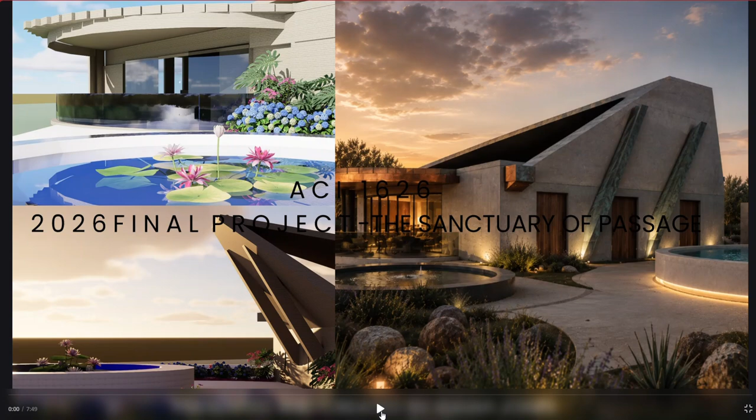Hello, good evening. I'm Isaiah Jones, and for my project, I have created a sanctuary titled The Sanctuary of Passage. This project goes into depth detail about my design, its iterations, and the design process that created my Sanctuary of Passage.

The concept word that I used to influence all of my iterations for my project was Regenesis. The Temple of Regenesis is a monumental sanctuary where earth, nature, and light converge to honor the deceased and celebrate the cycle of life, death, and rebirth. Through stone, wood, and steel, the architecture becomes a universal spiritual language rooted in nature and open to all faiths.

My sanctuary site and schematic design analysis. The strengths, weaknesses, and opportunities, as well as the threats, are all listed on this page. The strengths have an open space in nature and the stillness in the woods that supports the site's purpose to be used for meditation, mourning, and a life cycle.

The weakness is the pests in nature and the natural corruption of environment due to natural causes. Opportunities that can be listed in the sanctuary are cultural interest in spiritual spaces, nature and integrated design, high foot traffic, and potential city development support. The threats are, of course, the wildlife, as well as flooding, nature corrosion, and the decay of natural materials due to weather, like the wood that is used for the sanctuary.

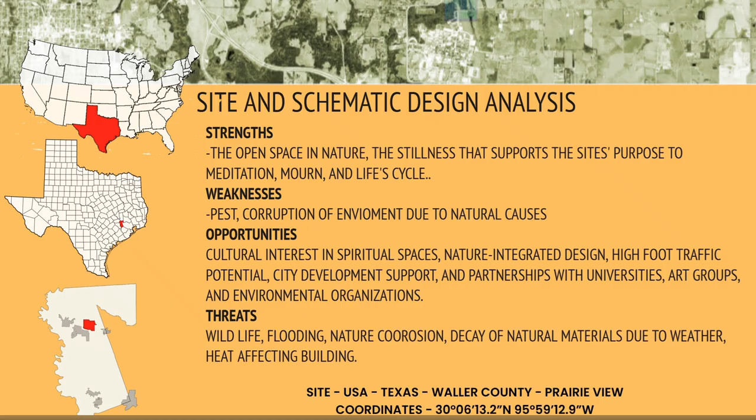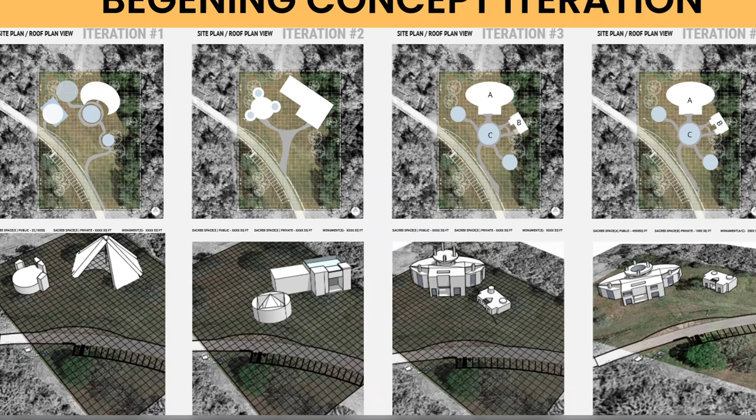With my beginning iterations, my design evolved from basic abstract geometry to a more complex, spiraling, symbolic architecture that physically manifests spiritual transformation. Each iteration refined the relationship between form, water, and light until the sanctuary becomes a living symbol of rebirth and unity. After several iterations, my sanctuary is no longer just a structure, it is a spatial ritual.

It captures the essence of a sanctuary by unifying form, function, symbolism, and site into a coherent experience of life, death, and rebirth. Every iteration built towards this monument of clarity, a place where architecture becomes spirit.

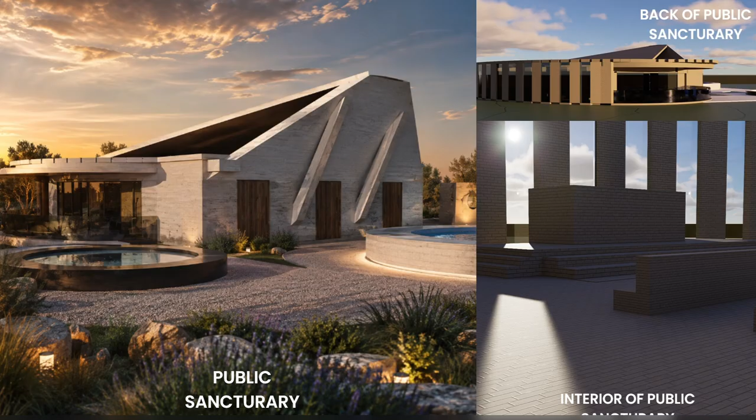With my monument, the three bodies of water, life, death, and rebirth, form a continuous spiritual cycle that honors those who came before. Each pond acts as a living memorial, life representing the vibrant energy and legacy of the individuals who once walked the campus.

Death acknowledges their passing, the stillness of water mirroring the silence and remembrance. Rebirth symbolizes healing and continuation, the campus and the community rising to recognize and preserve their stories. The water's reflective surface invites viewers to see themselves within history, turning memory into participation.

As light moves across the ponds, it transforms the space into a sacred landscape, a place where unmarked graves are no longer invisible, but revered through nature's eternal cycle. This design becomes a spatial and spiritual act of reclamation, uniting architecture, memory, and healing in Prairie View's continuing story.

Precedent sanctuaries that I used as inspiration to create my sanctuary are the Baha'i Temple of South America, as well as the Mountain Church of Julong and the Lotus Temple in Delhi, India. These sanctuaries each played a large key role in my building design, such as the glasswork in the threshold inspired from the Baha'i Temple, or the open glass frame and linear pattern of glass on the face of the sanctuary inspired from the Mountain Church of Julong.

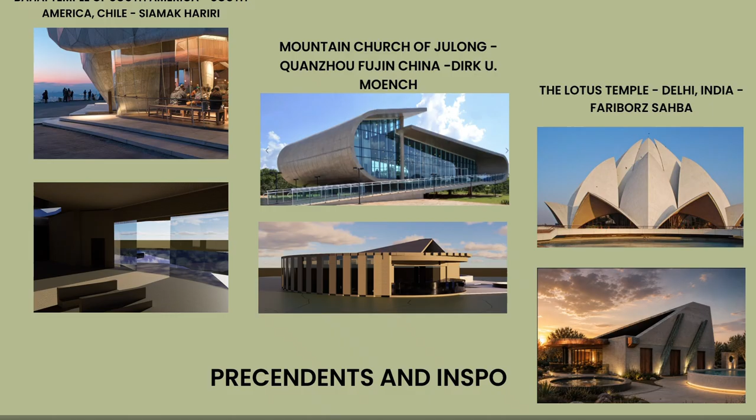My sanctuary's elevations and sections show how form, light, and symbolism merge to create a space that is both physical and spiritual, a place where transformation and rebirth takes place. The elevations highlight the dynamic roof geometry, which rises sharply to symbolize ascension and transcendence, a visual metaphor for spiritual awakening as well. The sectional cuts reveal how the interior volume

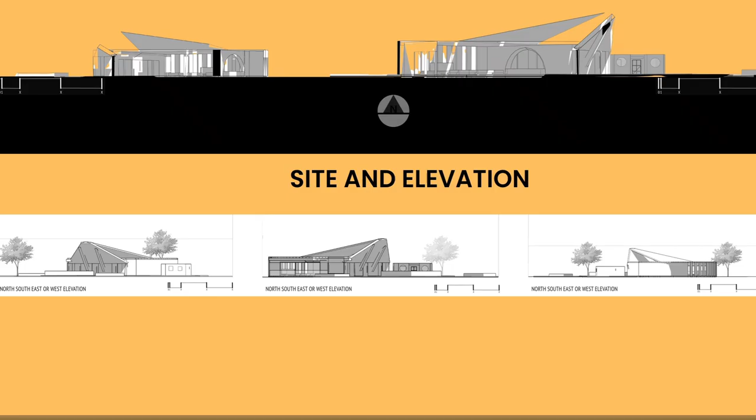unfolds and compresses entry spaces to expansive sacred chambers. My sanctuary's floor plan lists in the keys: 1, the public sanctuary's foyer; 2, the public sanctuary's private reflection hall; 3, the men's and women's public restrooms; 4, the public sanctuary's prayer pit; 5, open balcony space; 6, the courtyard; 7, private sanctuary; 8, private sanctuary's private restroom as well.

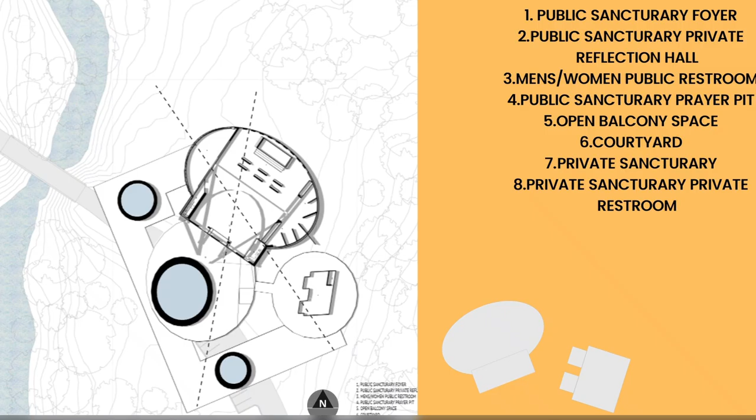Lighting, color palette, and material work together to create a calm, sacred, and transformational environment. Indirect lighting softens the emotional tone, neutral colors unify the architecture with the water, and smooth, reflective materials reinforce the symbolism of life, death, and rebirth. Light texture adds warmth and human presence, strengthening the spiritual atmosphere of the design.

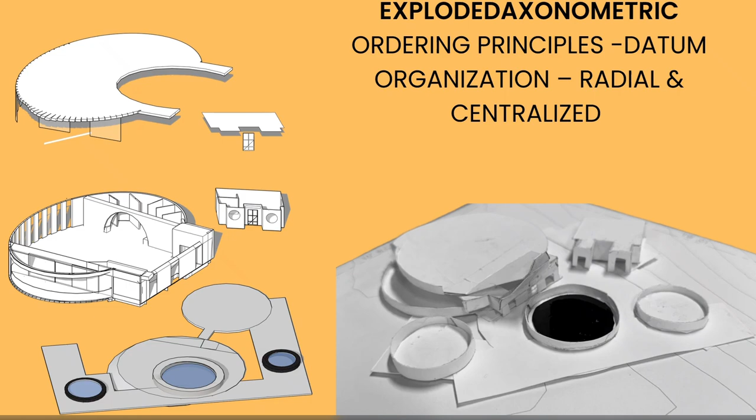These are the partis that fueled my design, originating from the Memorials and Monuments Project, where we use qualitative and quantitative words that influence our partis. These partis have impacted my design, such as the words ebullient, and this parti because of the organizing principle and shape.